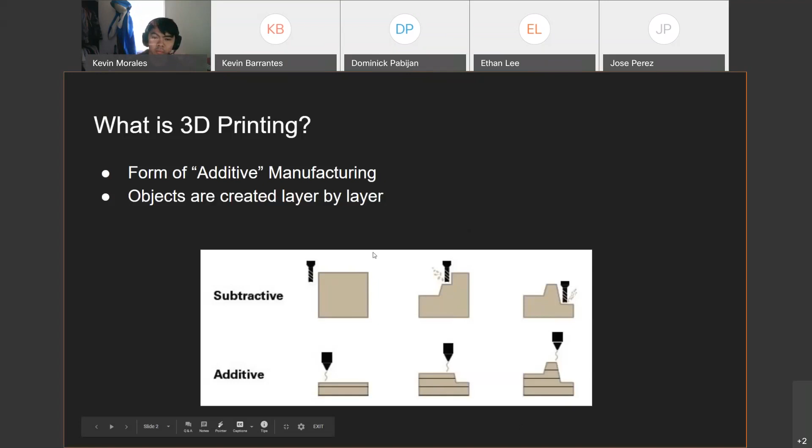So there's 3 different types of 3D printing. From top to bottom, it's going to be the cheapest, starting to get cheaper, and the most expensive. There's FDM or FFF, which is fused filament. These are going to be 3D printers that you can buy at home and use at home, and the main stuff that's available to you. That's what I described before, where you have your plastic that gets heated up, and then layer by layer you build it up into the object that you want.

There's also SLA or resin printing, which is you have a vat of resin, and then at the bottom of that vat you have a screen that emits UV rays, and you emit the rays in a certain pattern, and then same thing, you just build it up layer by layer until you have the object that you want.

And then there's SLS, which is selective laser sintering, and this one's actually pretty cool. You have essentially a tank of powder, which is usually like a nylon powder or some sort of polymer, and then you have a laser that shoots into the powder, and it goes - not sure how fast it goes, but it's pretty fast. And what it does is it will melt the powder into whatever object you're looking for.

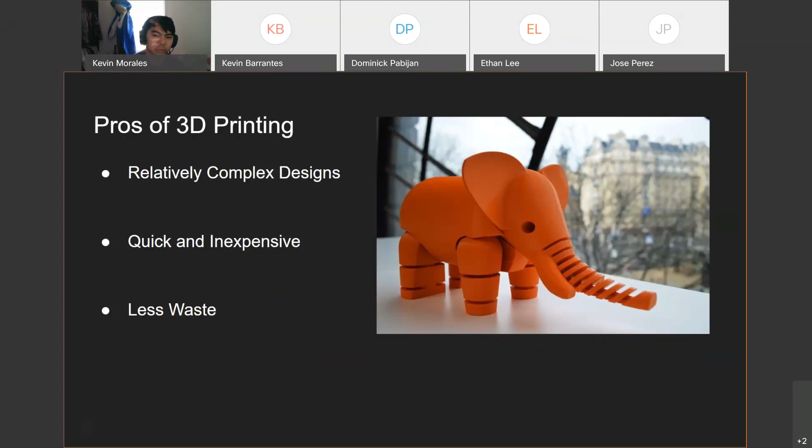But with that comes some pretty massive cons, where mass production costs more. So let's say you want to make 20 cubes. If you're doing that through machining, all you really need to do is get your material, cut it up, and depending on how it's shaped, it's going to be pretty quick. But for 3D printing, you have to take time to basically make all the cubes from scratch. So it'll take a lot more time, and most of your money is going to be used in not material, but actual production cost.

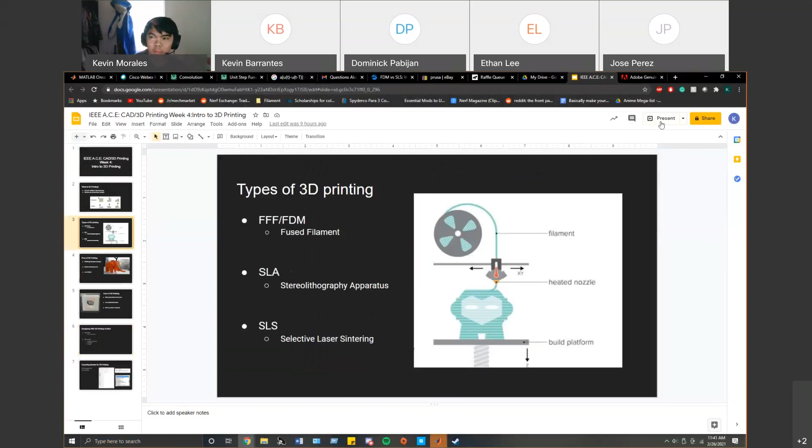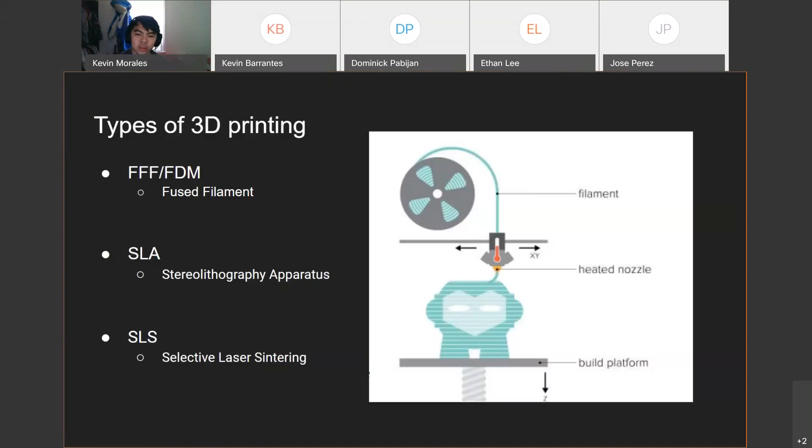And then also with 3D printing, there's less material choices. Because, with 3D printing, you're heating up something, melting it, and then putting it down. So you're really restricted to things that you can melt. So most of the time, 3D printing is going to be using a type of plastic. I think the makerspace right now only offers PLA, which is a corn-based plastic, and PETG, which is like the same plastic they use in water bottles.

So if you're just looking to prototype, it's fine. But for final products, you might have to do some post-processing, or you're going to have to design models with 3D printing in mind, which is what we're going to get into in a bit.

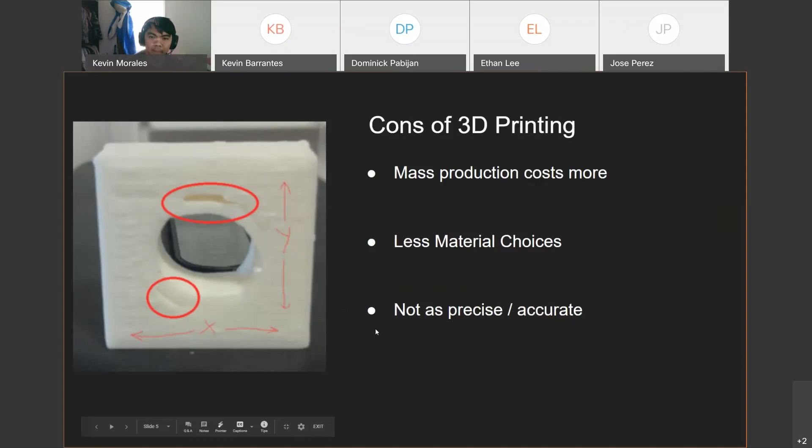With 3D printing there's two sides. There's the CAD side, which is when you're 3D modeling, and then there's the slicer side, which is how you turn your 3D model into something a 3D printer understands. So today we're just going to focus on the CAD side, and next week hopefully we'll get into the slicer side.

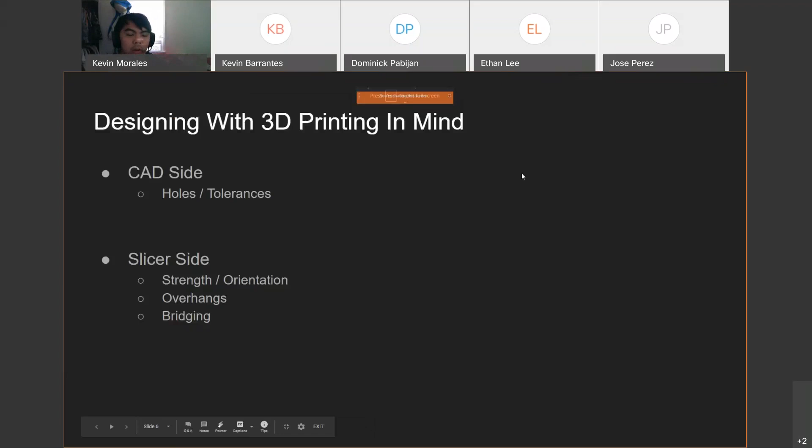Oh man, I forgot to add this. So the main considerations for CAD side modeling are going to be holes and tolerances. I'll stop that, and then I'm just going to open up Inventor real quick.

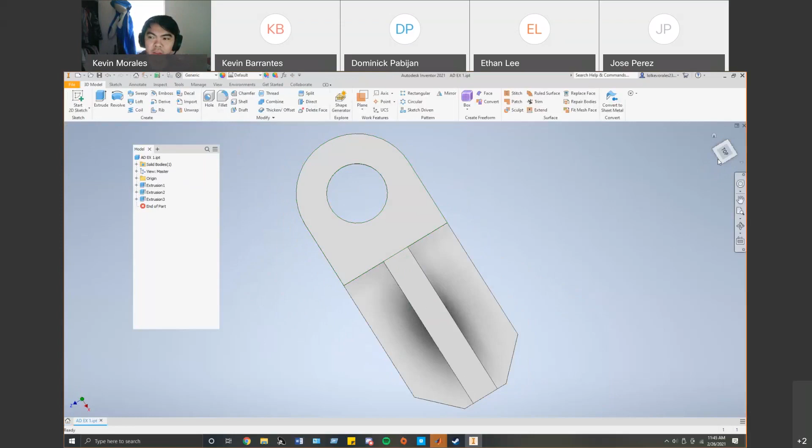Alright, so I'm going to open up the first model that we worked on. This is the first model that we worked on with CAD in these sessions, should be, I think, week 2 or 3. But I'm just going to use this as an example for now.

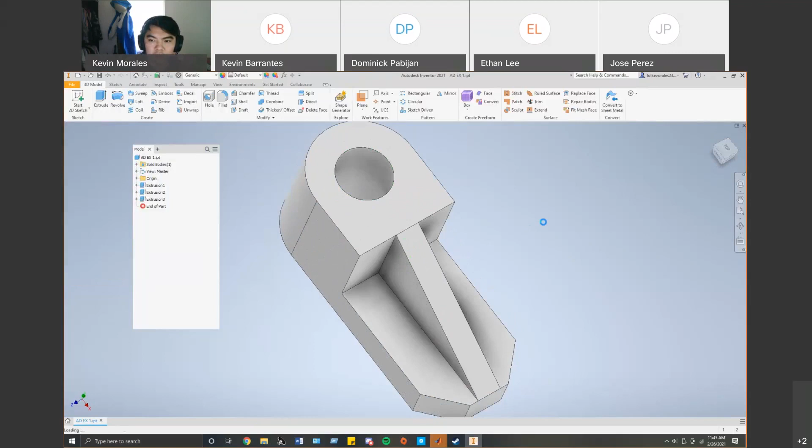So if you guys wanted to 3D print this, just need to open the drawing. This model has that one center hole, which has either a 15 centimeter or a 15 millimeter hole in the middle, right here. But when you actually go to print that or make that model, it's going to come out more like 15.1 millimeters or 15.01 centimeters, depending on how big you're printing it.

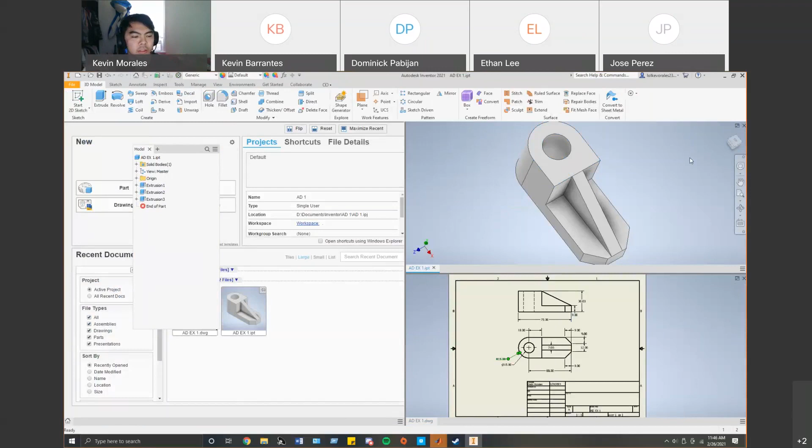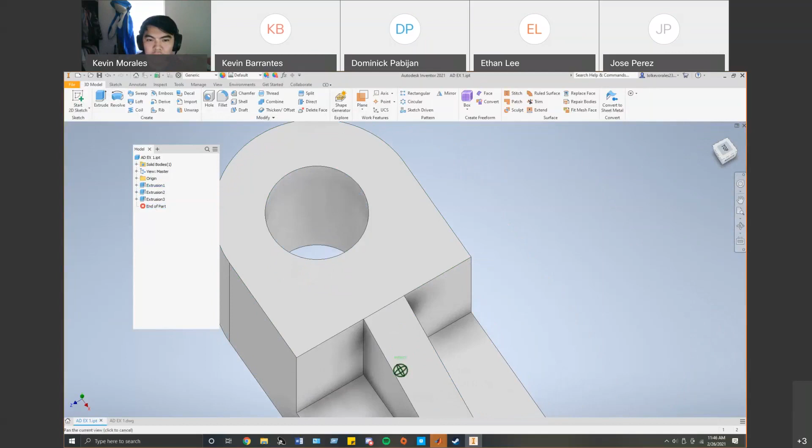And depending on how tight you need it to be, you would want to model in your tolerances. So let's say this is 15 centimeters or 15 millimeters. Yeah, it's actually better if I do this in the drawing. Let's say your hole here is supposed to be 15 millimeters, and then once you have it, you're supposed to put a peg that's 15 millimeters round.

When you 3D print it, this hole... question about... someone had a question? Yes, me, Ricardo. I have a question. Sure, what is it?

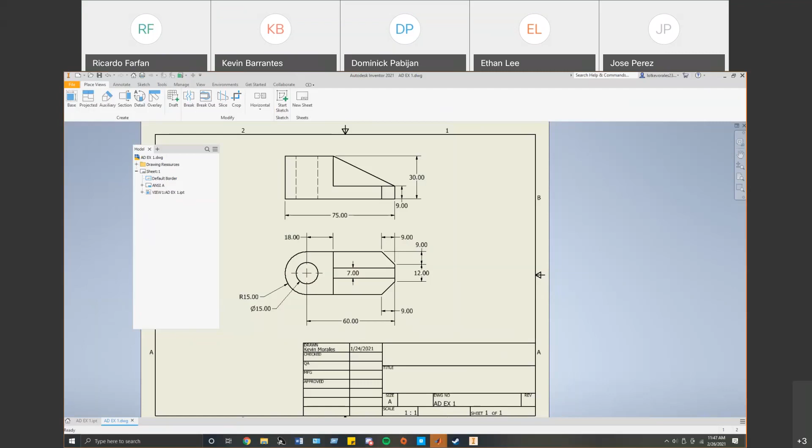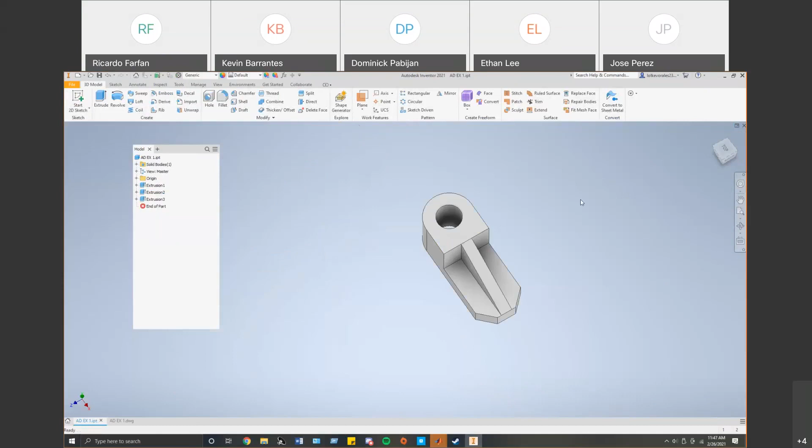About the... okay, so I used Inventor before. My issue is sometimes I accidentally press a sketch, or I want to revisit a sketch on a face of a diagram or whatever, but it never finds it when I right click. It doesn't show up like the edit sketch option. So how do you... I know you can check right there where you have the model, it says sketch right there, but is there a way to see or highlight it specifically to see which it is, without creating a new sketch? Yeah, because that's kind of my issue.

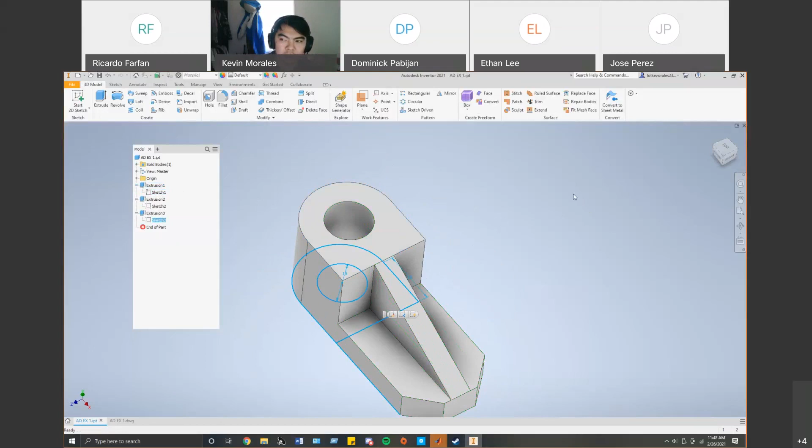So if you go to, here I have my extrusions, and if you expand that, it should have the sketch it came from. Then from there, if you click the sketch, you should be able to pop it up. Right click and then edit sketch. Not sure if that answers your question or not. Yes it does, thank you. Alright.

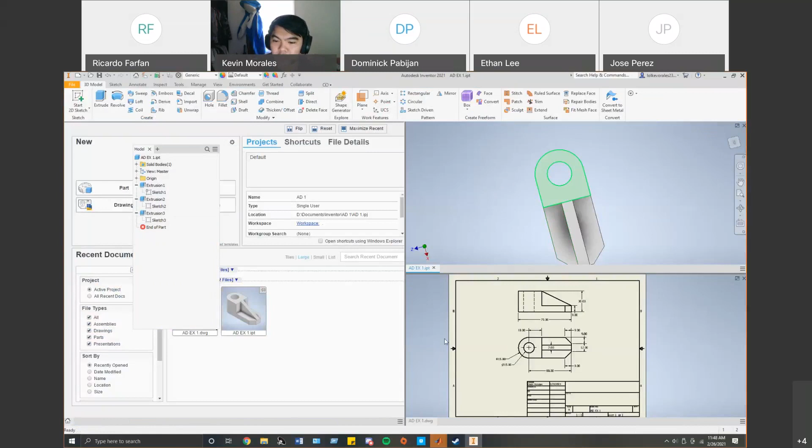So back to the tolerances. Alright, so this is just the drawing. Let's say you have a 15 millimeter peg that you're planning to put through this 15 millimeter hole. When you 3D print this part, you want to tolerance the hole.

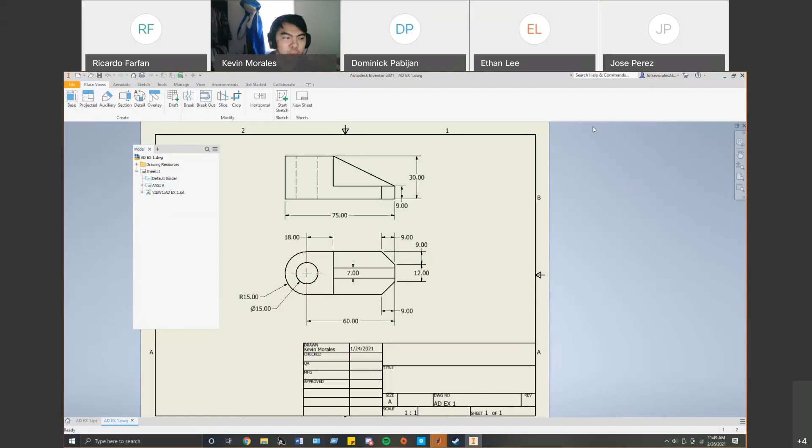Back to this. So yeah, when you 3D print this, the hole is not going to be 15 millimeters, it's going to be a little bit smaller. So it might be 14.99 millimeters or something. It might be small enough that the peg might not go cleanly through, which depending on what you want or what you're using it for might be good. But if it's too tight, you might have to sand it down. If it's too loose, you might just have to go in there and retolerance it or reprint the part and remodel it. So let's go into here, and we're just going to edit our sketch.

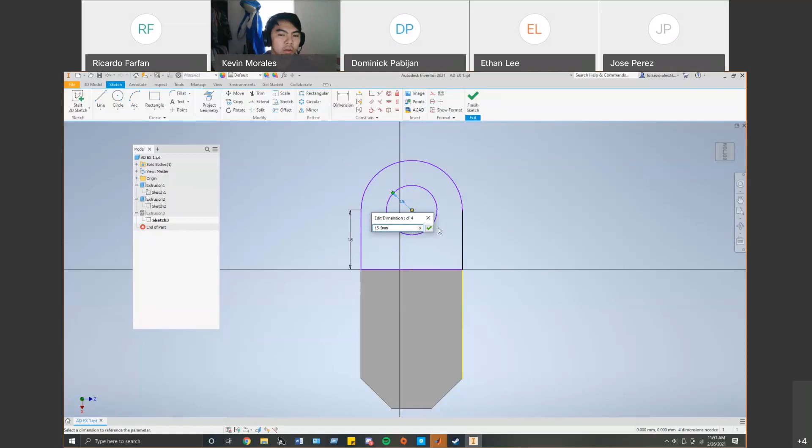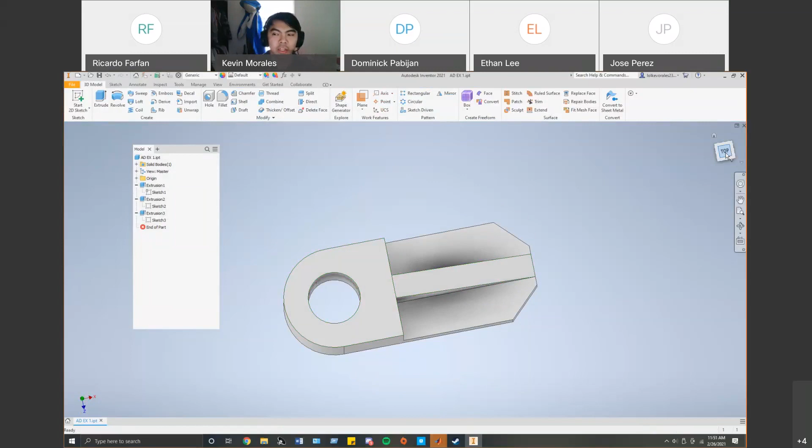It's not gonna look too different on here, just because it's half a millimeter or a quarter of a millimeter. But when you actually print your part, it's going to be not as noticeable, but when you actually try to put it in, you'll really feel the difference.

So I actually have a good example right here. So let's see.

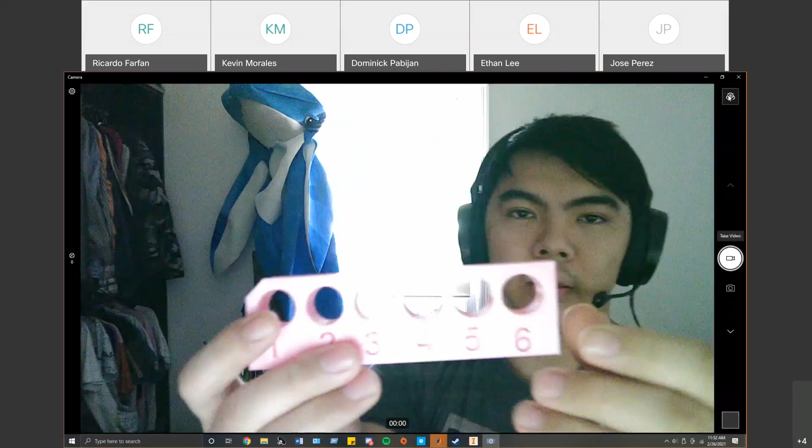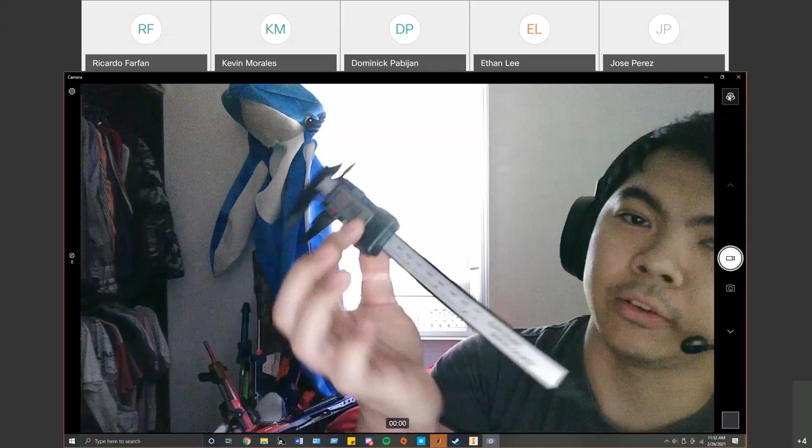All right, so let's take this part for example. This is actually a tolerance block. All these holes look the same, but if I take a caliper or some other measuring device to it and just measure the inside, this hole 6 measures as 16.2 millimeters, where hole 1 measures at 14.8. And just looking at it, you wouldn't be able to tell that, but in your model, that's something you have to consider.

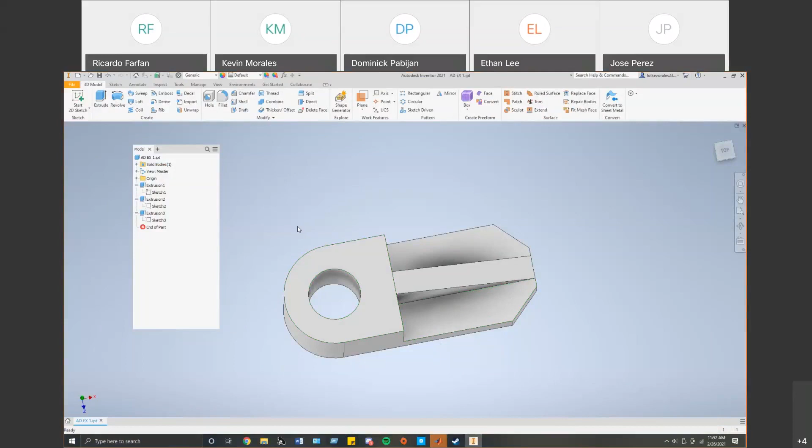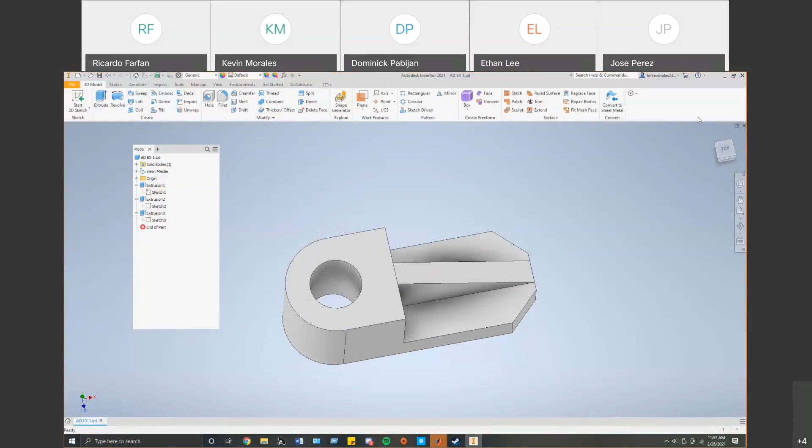That's one big thing you can do when you're actually modeling - you want to consider how tight or how loose you want the hole to actually be.

And then when you get to your drawing or diagram part, you also want to note that in the dimensions. So let's say this hole is 15 millimeters, you'd want to add plus 0.05 - and that's just in your drawing.

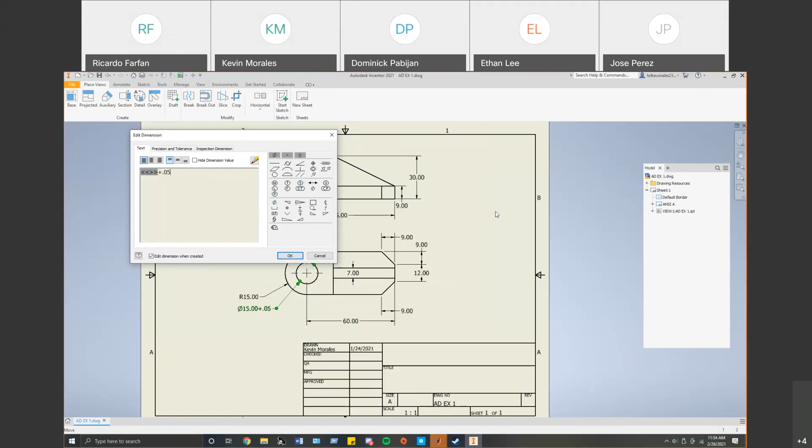So if you ever want to share your model, you generally want to give them the model and the drawing. And most people will look at the drawing first just to see how loose or how tight the object actually needs to be.

And then that's it for the CAD side. The slicer side is a whole topic on its own for now, just because you would need to learn how to slice it. By slice it, I mean, as I said, when you 3D print, it goes layer by layer. So when you slice an object, you're literally just taking your model, slicing it up into different layers so the printer understands what you're doing. But it sounds complicated - it's not really, but it's better off on its own topic.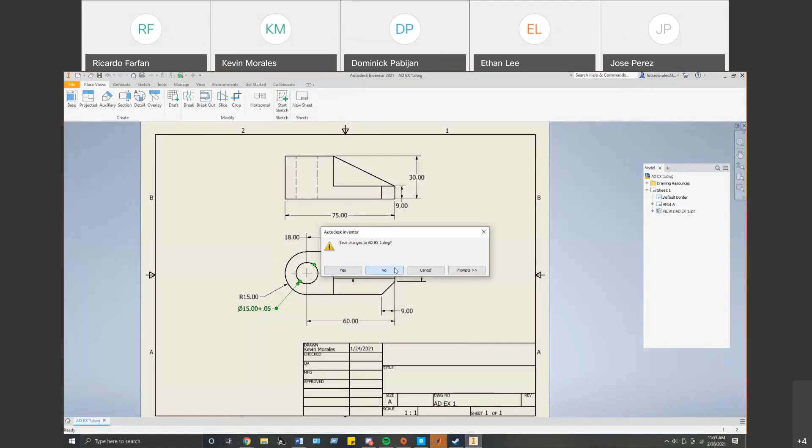So let's open this back up. All you have to do is go to the model, hit File, Export, and then you want to do it as a CAD format. So Inventor has its own file to save as, which is .ipt, which is Inventor part file. I think SolidWorks also has their own file. And then Fusion 360, which we'll go over later on in the semester, also uses their own file, just in their own workspaces.

But CAD files are files that are recognized by pretty much every program, and those two are going to be STEP files and STL files. For now, when you want to export your file to be 3D printed, you want to do it as an STL file. What STL does is it saves it just as a bunch of triangles, to oversimplify it.

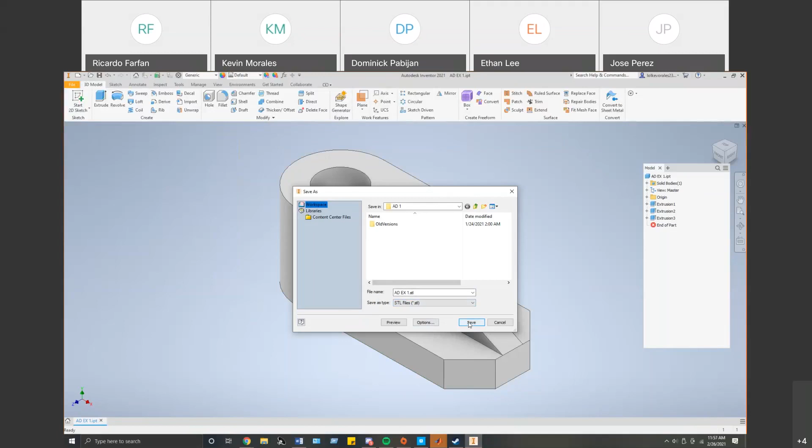So you have it as STL file, name it whatever you want, save - and it usually asks for coarse or fine, but I'm not sure if it does that anymore, so let's try that again. So export, CAD format, STL.

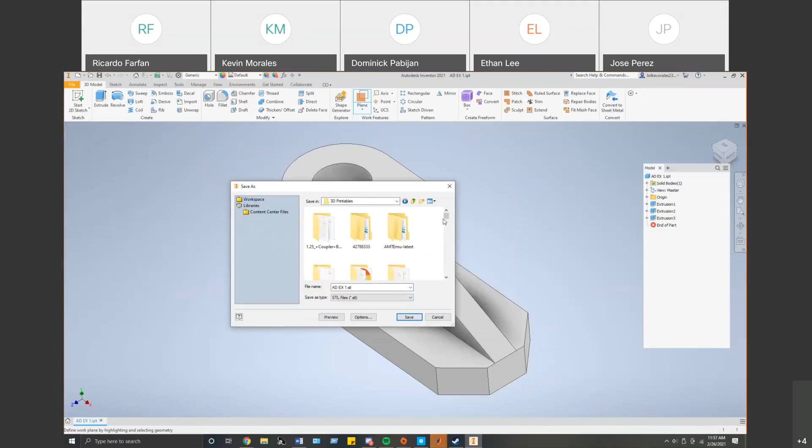Oh, quick tip - when you save out STL, it saves it to the Inventor file. If you do this a lot, or have a lot of files you want to save, I suggest making another file. Personally, I just have a whole file called 3D Printables, with everything I've ever worked on 3D printing wise. That's just a quick tip - it makes it easier for things to find later on.

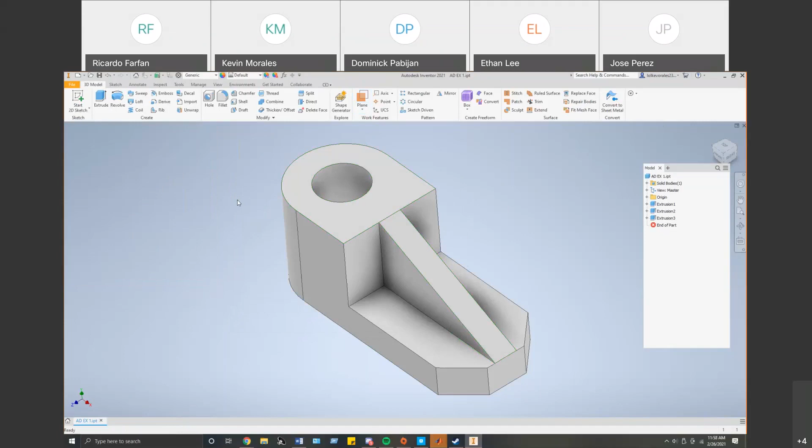But yeah, it's that easy - just export, CAD format, choose STL, and save. It's pretty much that easy for saving it. The hardest part is when you have multiple files, just because depending on your computer, it might take a little longer.

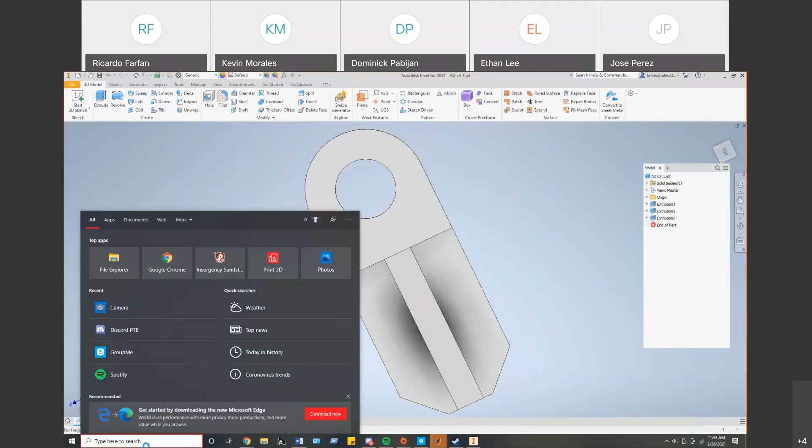And then once that's over, I think most Windows computers have it. It should be 3D Builder. And you can use this to view STL files. So from here, I'm just going to...

Is this used in engineering? I never heard of 3D Builder. Sorry if you explained it already.

Yes. Because in Inventor, you do your part, and then you put everything together in an assembly, and then present it. The assembly is good for talking to other engineers, or other engineering firms, because you can send your assembly file over to them, and then they can figure out how to use it. Where 3D Builder,

it's not as easy as using Inventor, but you can put everything together in a way that if you have a client that doesn't really understand it, not engineers, it just puts it together in a way that most people can see it and understand it.

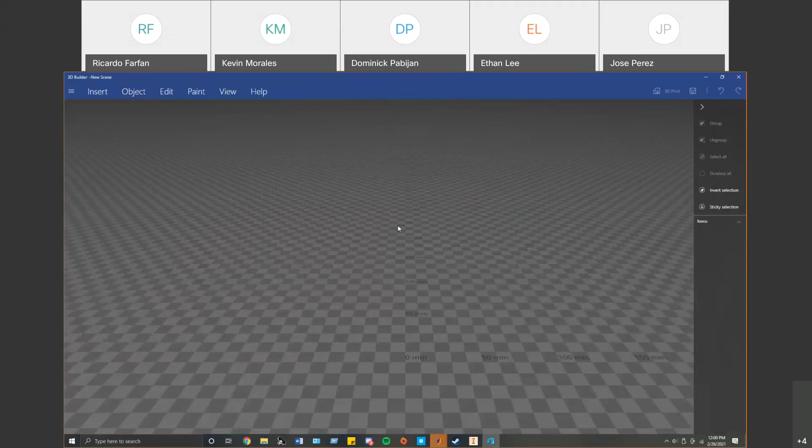So let's say I'll do new scene, insert, add, and then go to load object, load my STL, and there it is.

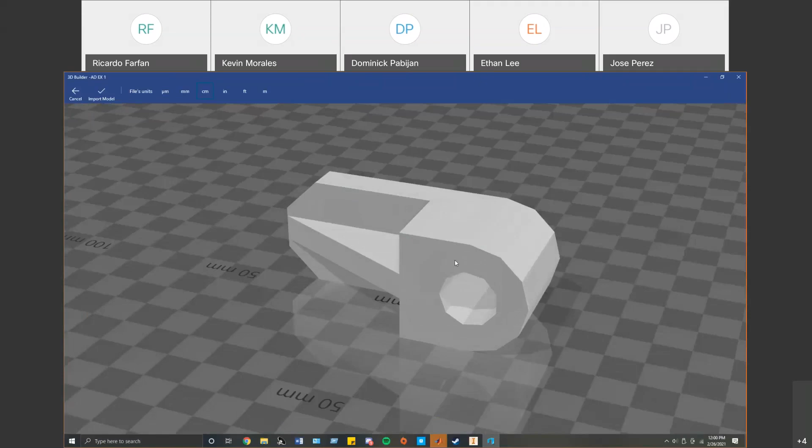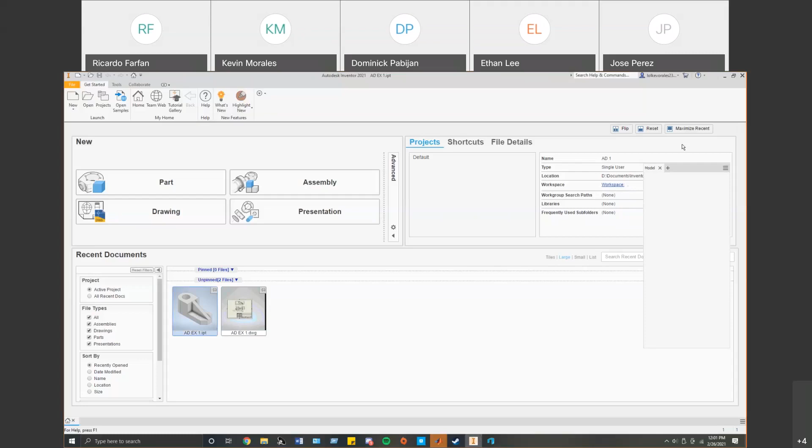And here's what I was talking about before. When you export it, when you're doing coarse versus fine, it should pop up. I don't know why it didn't this time. But this edge, or this face, should be rounded. And this should be a round hole, where you see it's like flat surfaces. And then in my actual model, it should be perfectly smooth.

So I'm going to try exporting it again. That doesn't work. Okay, there we go. Oh, that's not it either. Oh wait, yeah. So here we have resolution. So go options, resolution, and then let's try going for high.

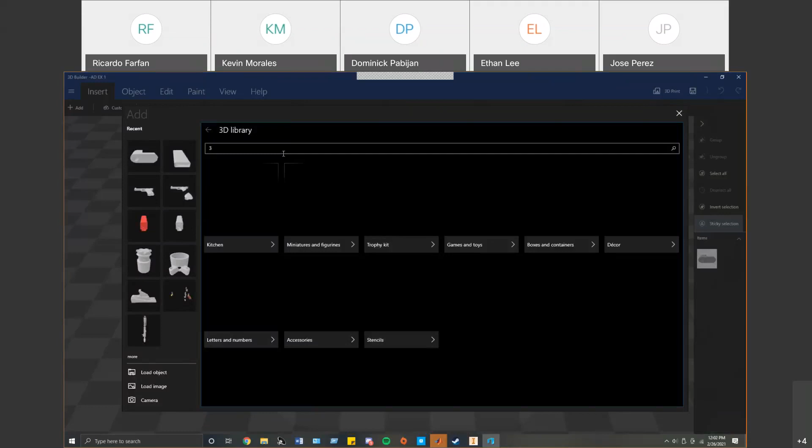AD EX high. Save that. And then let's try adding it again. Alright, see, it should have worked that time. Alright, yeah, there we go.

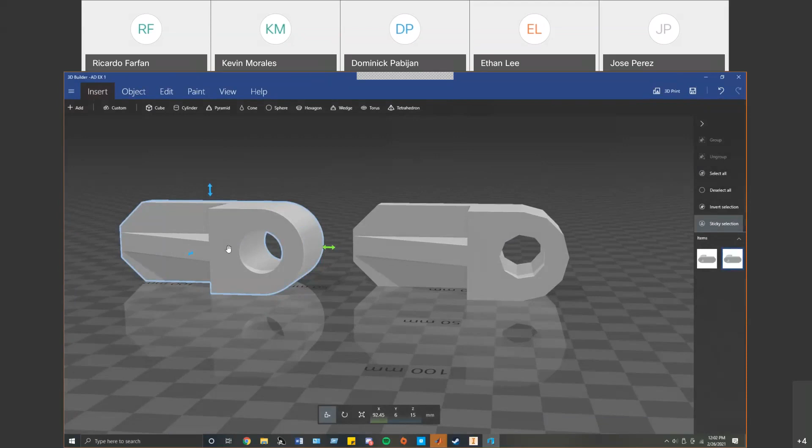So here you see it as perfectly smooth outside and inside. It does look a bit artifacty, I'm going to say. If you ever played the PlayStation 2, you know how some of the models are really just polygon? So you kind of see it here, but not really compared to this one. So when you do export, CAD format, options, and then high, that should be it.

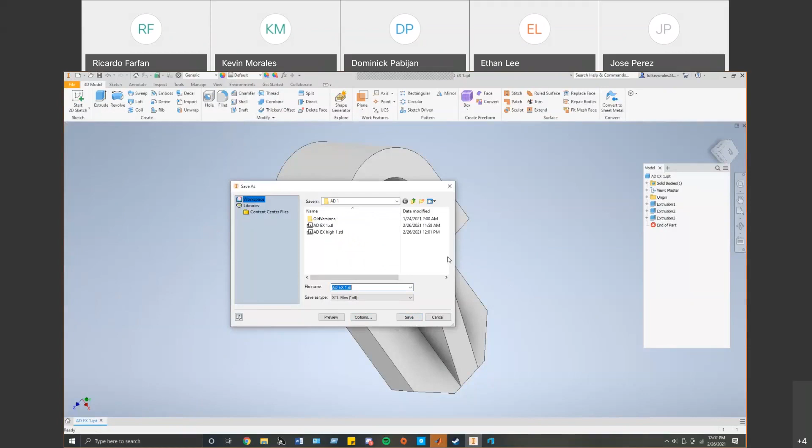And then, let's see. That should be it for today. I feel like I kind of rushed this, but that's all I've got for now.